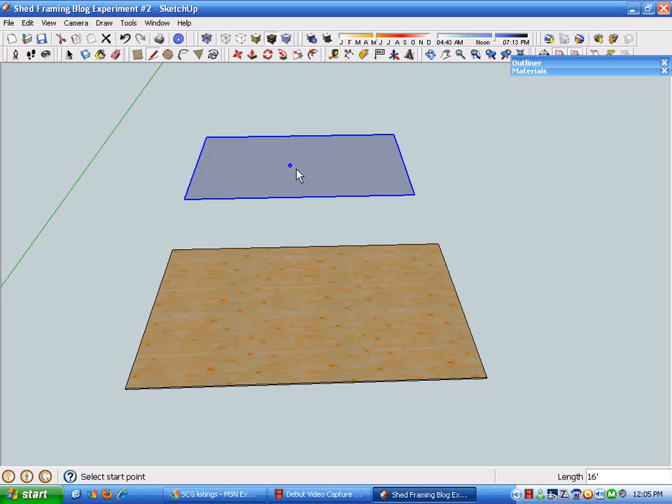With the subfloor component established, our next step is making some wall plates for this little shed project. I'm going to use the border we created in the first step to start with for making the plates. By redrawing one edge, you can see it reestablishes the face.

There's another handy tool that helps us in our building process, and it's the offset tool. So this rectangle has the exact same dimensions as our plywood subfloor component.

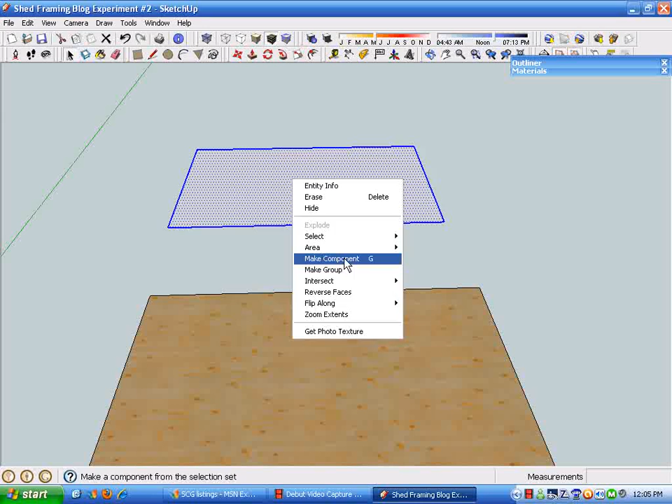While I'm thinking about it, we're going to make this a component and call it the wall plates. When making components, you always need to make sure this box is checked, the replace selection with component. Sometimes the software unchecks that box and you go do a bunch of work, and all of a sudden you realize that all the work you did was not in fact creating a component. It can be frustrating. So we've got that step out of the way.

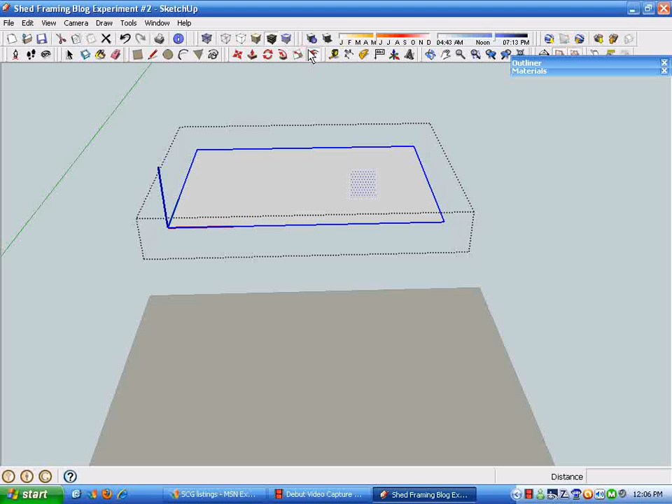Now by double clicking I select all the edges and faces connected in this component. I press shift, which deselects the face, grab the offset tool, and pull this in. I'm going to make that offset 3.5 inches to represent a 2x4. That's a nice way of drawing two concentric rectangles, 3.5 inches apart. We don't want this whole face in here, so we'll delete that.

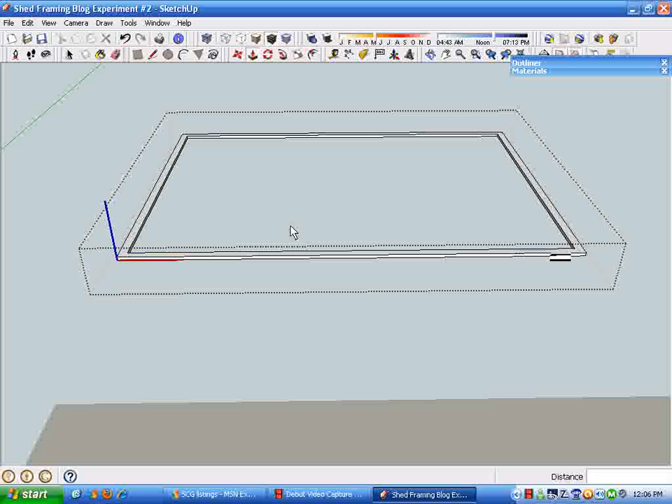Grab the push-pull tool and pull our little plates up 1.5 inches. You notice how I enter decimal inches - they're just easier than typing a slash sometimes, so that's what I did. Anyways, so there's a 3.5 inch plate component.

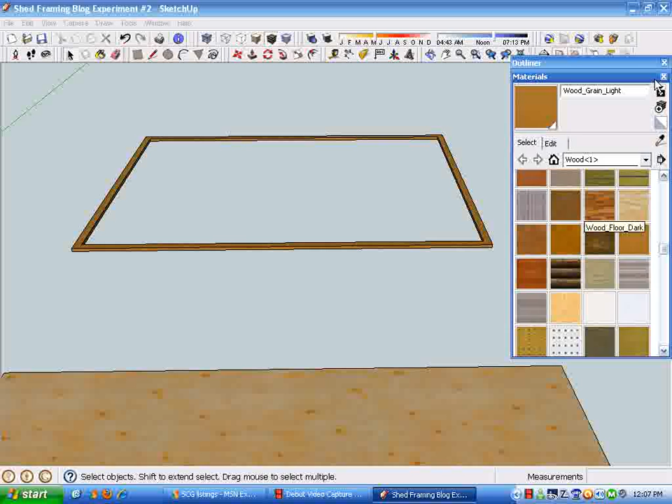By clicking outside, I get out of the edit component mode. I'm going to go into materials here, and we've got wood selected, and we're just going to pick wood grain light and paint that component with it. That creates a wall plate that will match completely the exterior or perimeter dimensions of this plywood subfloor.

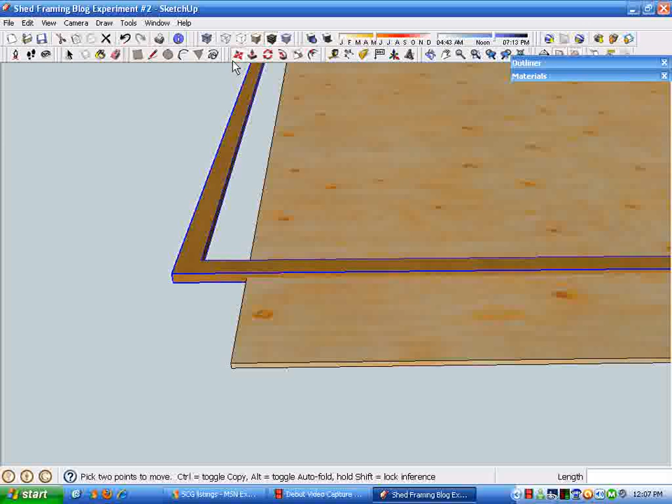And here again is a lesson in grabbing things to move them and place them. The wall plate component we just created is highlighted in blue, meaning that's the active component. We've got the move tool from here. I'm going to grab this lower corner and place it on the upper corner of our subfloor. With that, we've created the bottom plate to sit on top of the subfloor for our shed.

Sometimes by turning on the shadows, you can get an idea of a little bit of the perspective. It gives it a little more of the 3D view to it. And that shows the subfloor with the plates.